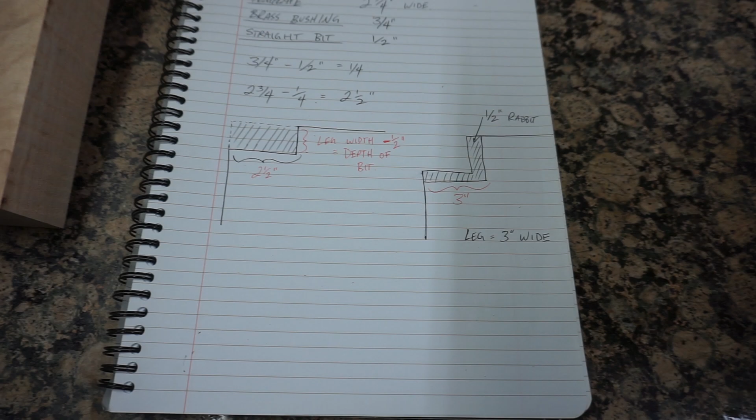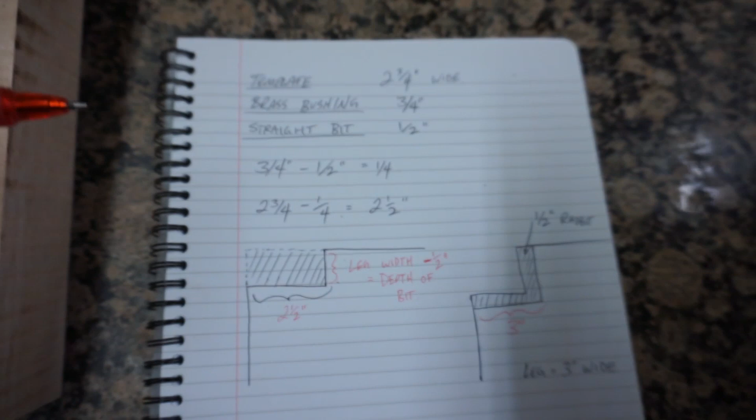So I just want to kind of go through the reason why we're making this gap 2 3/4. That's this gap right here. So just a little bit of theory on what's happening here. Essentially, our gap in our template is 2 3/4 inches. Our brass bushing is 3/4 inches, and our straight bit is a half.

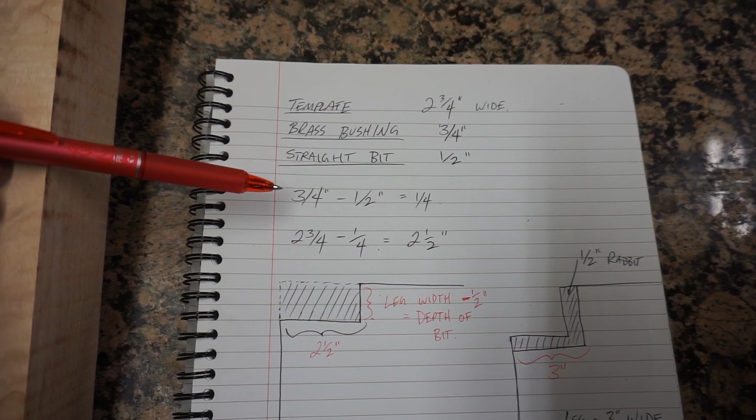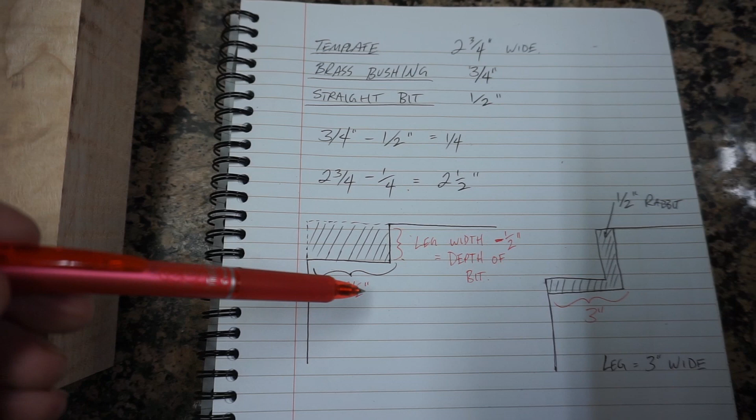So 3/4 of an inch minus a half is a quarter. 2 3/4 minus a quarter is 2 1/2. So if you remember, we cut our leg to 3 inches across. So our template will notch out 2 1/2 inches. Then we rabbet 1/2 inch. That gives us 3 inches wide.

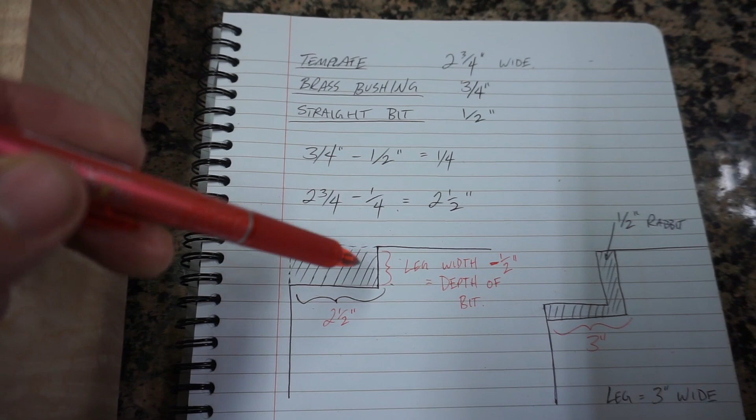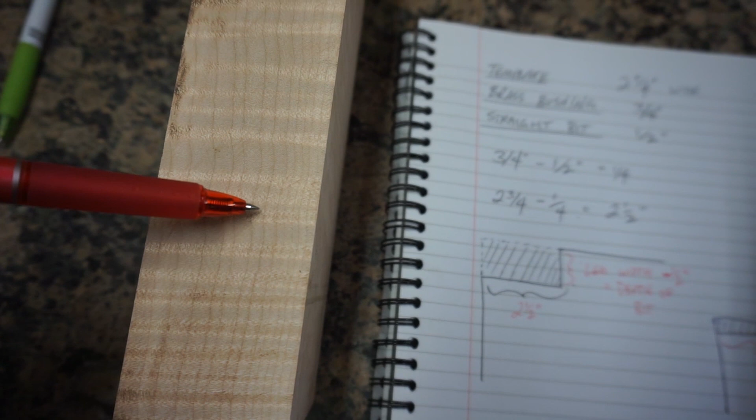This width is determined by the template, but the depth is determined by the plunge on the router. So to determine that, we take the width of our leg, in this case it's 2 inches. We know our rabbet is going to be 1/2 inch, so we go 2 minus a half is 1 1/2. So in this case, we are going to set our plunge depth to 1 1/2. We'll go over that when we actually make the Maloof joint.

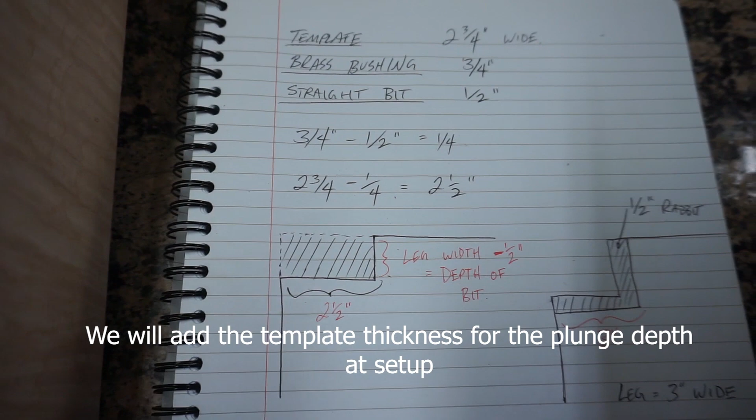Okay, so in the last video, we worked on building this template. So one of the things I did is I put this in my bench vise, and I actually routed out this piece here. So what I did is I took my brass bushing of 3/4 inches, my 1/2 inch straight bit, and I used it on here and just cut out this notch.

So the next step is taking this template and tracing the notch onto the top. What that's going to do is allow us to cut out a rough shape on the bandsaw. We don't cut it out to the exact size, we cut it smaller, but it's just less work for the router. So basically we set this on here, trace it out, make a little square there, and we're left with this. So we're going to do that on all 4 corners.

So what I'm trying to do at this point is I'm trying to figure out how deep of a notch I need to cut. So the depth is determined by the thickness of the leg. So I actually have 1 15/16. I had a little bit of a rough edge on some of these legs, so I decided to get rid of it. So I'm not exactly 2, I'm 1 15/16.

The rabbet around the Maloof joint is 1/2 inch. So I have to subtract 1 15/16 minus a half. So that leaves me with 1 7/16. So that's the depth I need to plunge. So I need 1 7/16 plunge depth, but you have to incorporate the thickness of the template into that.

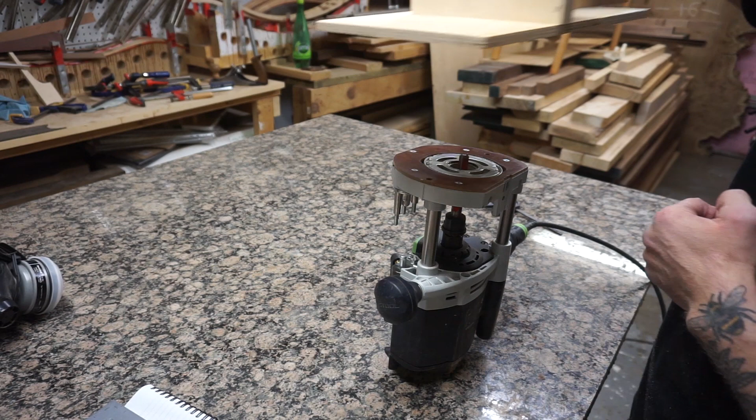So what I usually do is I will just take my template, I will clamp it on just lightly, just to keep it in place. So essentially that allows me to move this up and down, get my measurement, and everything stays in place. So what I'm trying to do is I got to take 1 7/16, but I also need to add the thickness of this top. Now the boards are 3/8, but I don't think birch ever really comes out exactly as it should, so I'm not just going to subtract or add 3/8, I'm going to physically measure it.

So what I do is I'm basically just going to plunge this down. Hopefully you can see here. It's going to plunge it down to 1 7/16. So right about there. I just lock it in. Take this guy off.

At this point, I will just set my depth using the depth plunge here. Set it up. There we go. I'll lock it in. Now we're good to go. So now we can just basically plunge and keep repeating that same depth. Okay, so we're at the point right now where we have the top clamped into a vise. Our template sits right on the corner. And what we do is we lock it on with a couple of clamps.